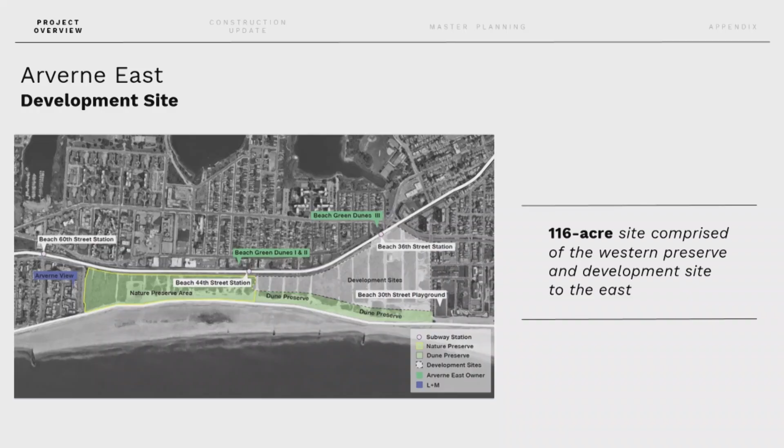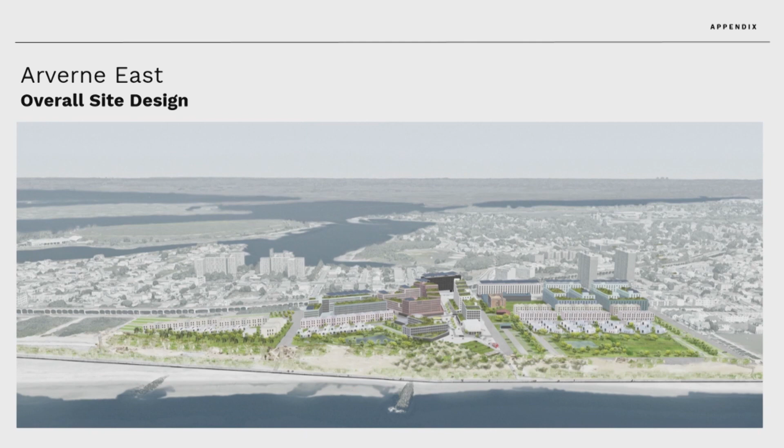So this is an illustrative rendering to give you a sense of what the site will look like when fully developed in context. Really what we're trying to do here is push the envelope for innovative, cutting-edge energy efficiency strategies and resiliency as well. Our goal for this project is really to show that you can build a mixed income, mixed use, environmentally just, energy efficient, what am I missing? Resilient project on the coastlines. So we're pretty excited about that.

Next slide. So just working through the development program, starting with housing. When fully built, we will have approximately 1,900,000 square feet of residential floor area across 1,650 units of housing of various typologies, from mid-rise multifamily to single and two-family townhouses. And what we're really excited about is we're bringing back a code-compliant bungalow to the area. The project is also a mixed income project. 80% is income restricted and affordable to households earning between 30% AMI and approximately 120% AMI.

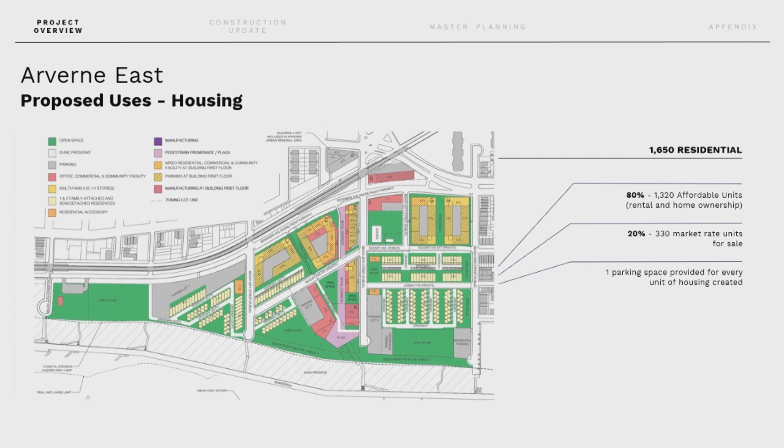20% will be a for sale market rate product. Looking at the non-residential space and going from west to east, we will be providing an approximately 3-acre not-for-profit run urban farm and native plant nursery. In addition to that, 10.5 acres of privately owned, publicly accessible open space throughout the development site to be programmed for both passive and active recreation uses.

There is approximately 300,000 square feet of non-residential space anticipated across commercial, manufacturing, and community facility uses.

I'm sorry, my neck keeps like.

Across community facility uses. We're also assuming a mix of retail typologies, including neighborhood retail and services to support the existing community members there and also future residents that will be living in the development. It will also include a 150-key boutique hotel, which will provide year-round programming and services, event spaces, meeting rooms, and a great alternative to JFK accommodations.

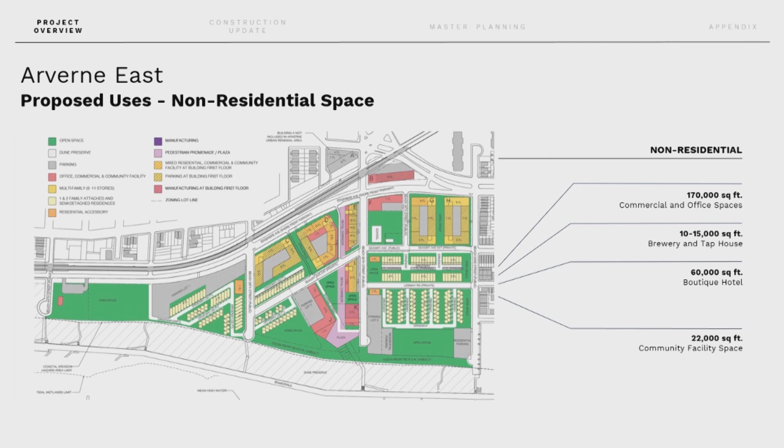We'll also be providing beach concessions, which are seasonal and really engaging with the beach plaza to the south and the boardwalk. They'll be bike-friendly, pedestrian-friendly, and paired with complimentary programming throughout the summer months. The retail program will be anchored by the Rockaway Brewing Company Brewery and Tap House. This will provide a year-round draw to the project and our residential promenade. The Rockaway Brewing Company is a local craft brewery in Rockaway that was formed and founded there.

Next slide. So how to approach development of, as Zach said, 116 acres of property that had been left vacant and underutilized for 50-some-odd years, that was decimated by Sandy. So the most important thing is resiliency. We don't spend a day in our office not mentioning resiliency in the context of this project. So we looked at it on 3 scales: from a land development perspective, from a topography perspective, really manipulating elevation, and also at the individual building level as well.

From a land development perspective, the development site itself is hugged by a dune preserve to the south of the site between Beach 32nd Street and Beach 44th Street. This provides a buffer to the north of the boardwalk but south of the development site. Most of the densest part of the program is really pulled north to Edgemere Avenue, which is a major vehicular spine in Rockaway.

We're also infiltrating all of our stormwater on site, speccing permeable hardscapes wherever possible, and also leveraging enhanced retention and infiltration through a system of bioswales and rain gardens. And hopefully in the next 18 months or so, we will proudly be the largest interconnected green infrastructure street in New York City with the reconstruction of Edgemere Avenue between 32nd and 38th Street.

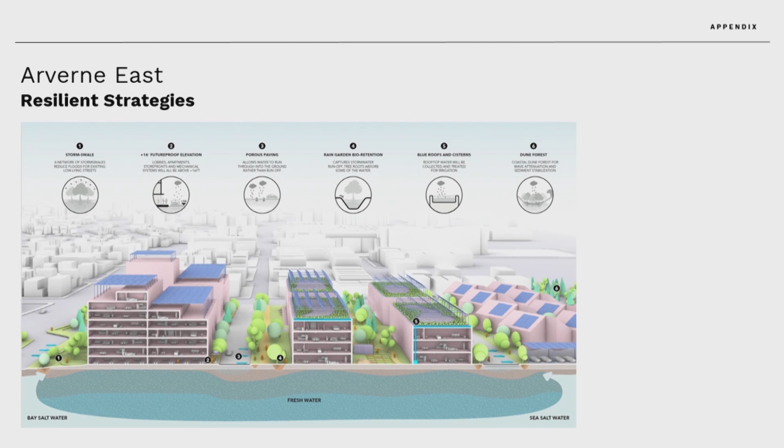Okay, energy efficiency. Again, we used a very similar approach with energy efficiency as we do with resilient strategies on this project, really looking at a suite of methodologies for our execution. Most importantly, on the geothermal side, we have experience in the Rockaways with existing properties in geothermal and those that are also in construction or pre-development. So we knew that the conductivity here and the geology was a really great fit for geothermal, paired with the diversity of the project, an ambient loop made the most sense to maximize energy efficiency.

So all of our buildings will be connected to the ambient loop to provide heating, cooling, and domestic hot water services. The residential buildings are being built to passive house standard and will also be taking advantage of significant renewable energy and blanketing the site with PV solar arrays to, I think when we're fully built out, we're assuming about 12 gigawatt hours. Did I get that right, Brian? 12 gigawatt hours? Okay. Of renewable energy will be generated on site.

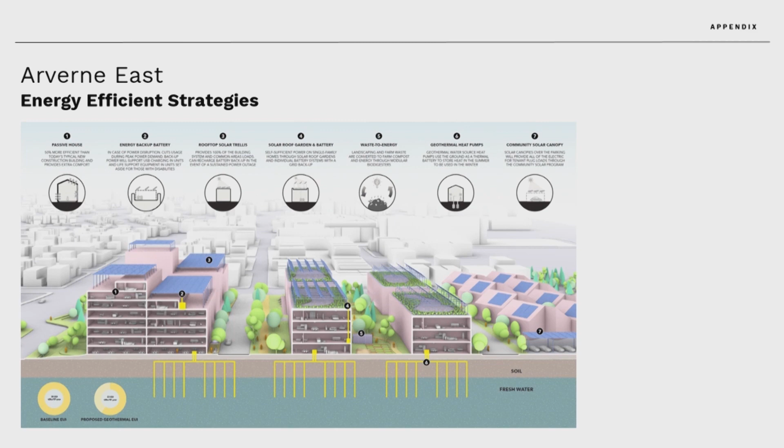So Rome wasn't built in a day. This is a phased development with a build of 7 to 10 years. Our build year is 2031. What you're looking at here are some of the assets that are currently under construction or wrapping up construction. We're wrapping up the restoration of the 35-acre nature preserve and a welcome center that will provide support to the nature preserve and to the native plant nursery and urban farm to the east. Those will actually be opening to the public later this spring.

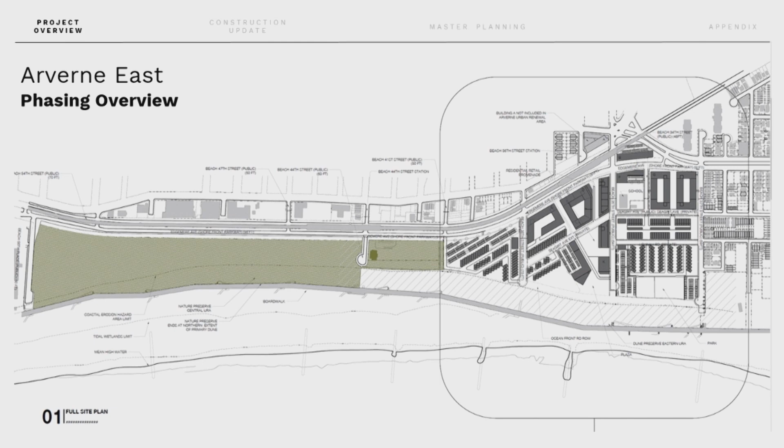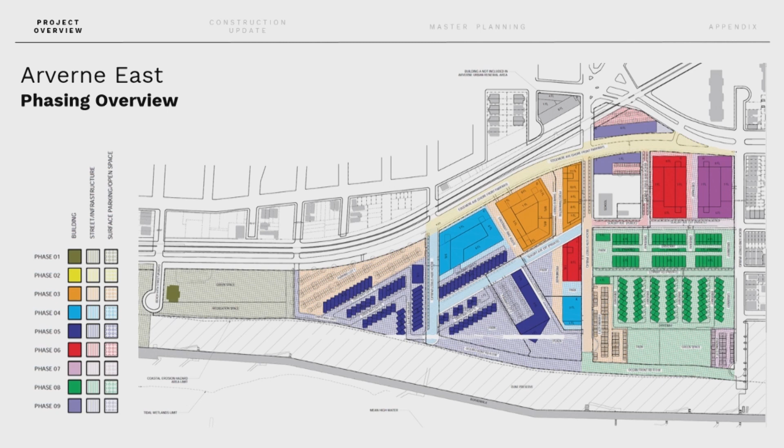Next slide, Zach. And then also, as I mentioned, Edgemere Avenue reconstruction between 32nd and 38th Street is currently underway. These are key public benefit projects that are pivotal to the success of the overall Arverne East project. And we're currently in design of the first residential building and parking lot, which is Arverne D, smack in the middle of the site, and the first phase of the ambient loop, which will commence construction in 2024.

and our consumption. I think the combination of the ambient loop and the passive house is really what is making net zero possible here, also leveraging site design and scale as well, but we're able to achieve net zero on site without any off-site purchasing or RECs.

I guess I'm gonna hand it over to Brian. Brian, you want this slide up? You want it? Yeah, thank you.

My name is Brian. I'm with Salas O'Brien, NY-GEO. And I don't know, was it maybe a year and a half ago, something like that, Sara gave us a ring and said, hey, we got this project and we got some really ambitious goals. And we looked at it and we thought, yeah, you do. This is really ambitious and how exciting.

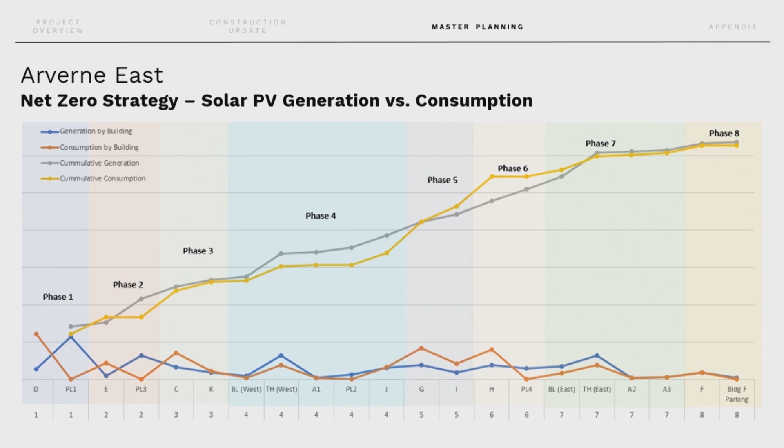And so one of the first things we did was develop the ambient loop roadmap, and that's what you see on the next slide, right, Zach? Go forward there. This was just the first concept of, number one, where can we put all these assets, and then how do we interconnect those assets to the buildings? And that all looked pretty good.

Initially, we put the plan down, started drawing lines on it, and it all just kind of came together pretty quickly. And then we get on a call, and Sara goes, well, wait a minute, this isn't all getting built at once. We got to phase this, okay? Now that throws a whole other wrench into everything because a lot of the space where we have assets to serve a certain load wasn't going to be available until the next phase.

So then you have to start going, okay, well, how do I interconnect all this and have enough resources and energy to actually get the first phase off the ground and get the second phase off the ground before you actually can interconnect everything in the final design.

And so if you want to go to the next slide, actually it might be, where's the color-coded one? Or did that get taken out? Oh, maybe it got taken out.

Oh, well. Anyway, we went through the phasing and the construction schedule and looked at how do we build this out and where can we put these assets and make it all work. And that's why there's actually a few double lines on the single pipe.

And those are really temporary pipes for the phasing schedule to be able to make it a loop, if you will, until the next phase is built, and then that would actually get shut off and force the fluid down the street to the next set of buildings and the next energy sources. So there was a lot of discussion conceptually about how do you make this work.

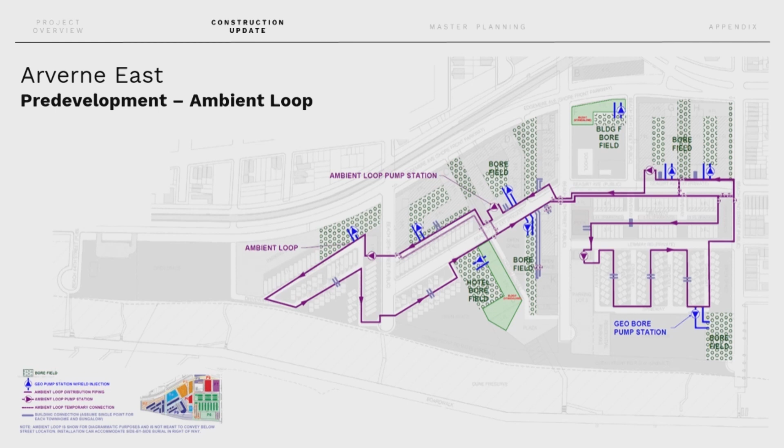But then, of course, we got into the energy side, and, Zach, if you want to go to the next slide. We looked at what the baseline would be. Obviously, when you do these studies, you have to have a baseline.

And then we looked at what is just an all-electric option? What does that look like from an energy perspective? And we also looked at carbon. What do those look like? And then what does a geothermal solution look like from an energy and carbon perspective? And then last, we added in sewage heat recovery or waste heat recovery. And so those are kind of the 4 bar graphs in the energy.

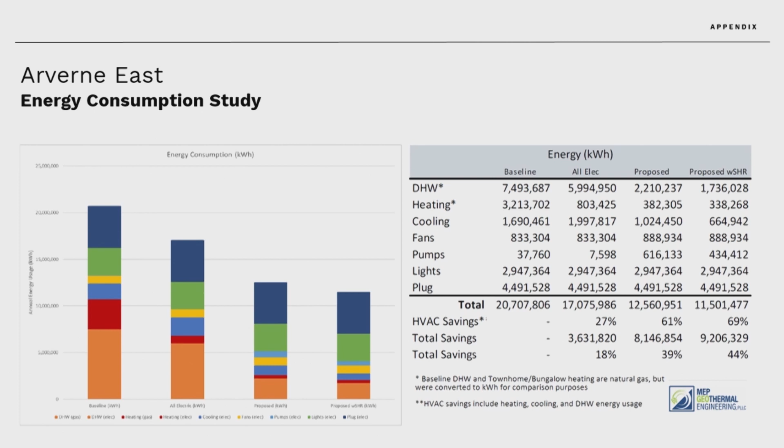And you can see, the savings is tremendous when it comes to energy. And then, of course, when you put dollars and cents to it, it looks really good. But the biggest one was the carbon. How do we get to net zero? And I think that's the next slide, right?

Yeah. So, when you add the solar component to this, because it's an all-electric development, now you can actually get to net zero. Not just net zero carbon, but net zero energy. You're actually producing more on site than you're using because we're very efficient and we're capturing every bit of energy that we can. We're sharing energy.

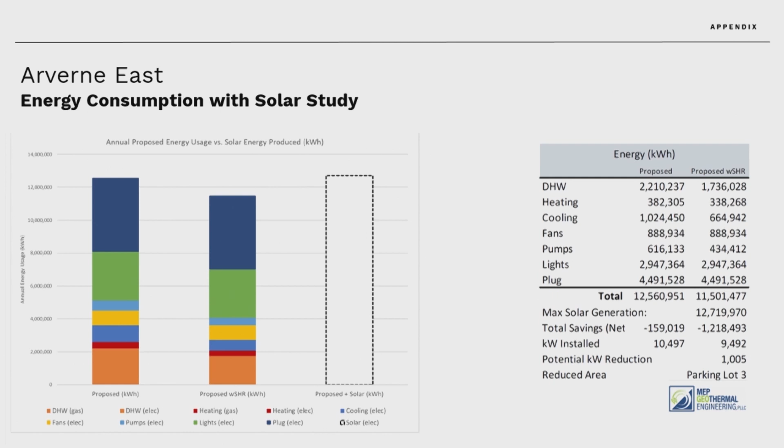That's kind of the study that we went through. It was really intense and a lot of fun. When you have big ambition, big goals like that, I think it really brings the team together and you can collaborate and open people's minds a little bit. And I think there was a lot of that going on. So we really appreciated the opportunity. But yeah, it's a fantastic project.

Yep, so I'm Sam Gerber with CDM Smith. We're doing the design for this project. And so where we start with the design, where you start in every geothermal project, is building energy modeling. As we kind of hinted at with the way we talk about phasing, a lot of these buildings are not yet in an advanced stage of design because they're not getting built for another 10 years. So we do, in eQuest DOE 2.2, block energy loads for these buildings with the information that we have right now.

And to get around the fact that the buildings aren't being built for quite a while, we run a significant number of sensitivity analyses on all of these buildings to try and account for the different things that we think can happen within the next 10 years. Because these buildings are all designed passive house, from what we do know, they're all going to be significantly cooling dominant. These are very tight buildings, very high degree of insulation, which leads to some challenges in designing our geothermal and ambient loop systems.

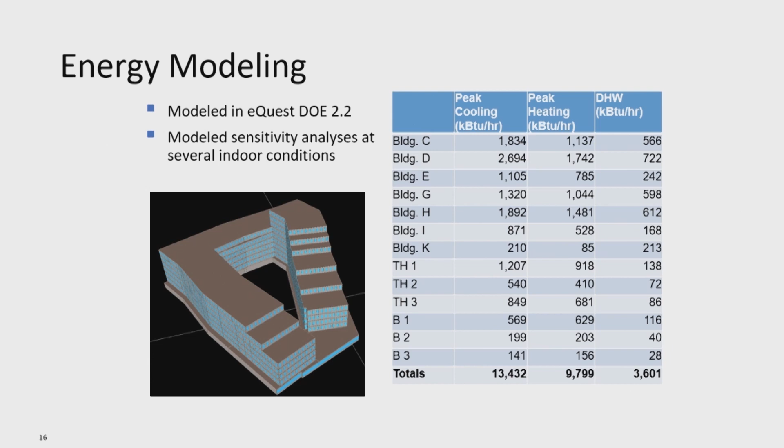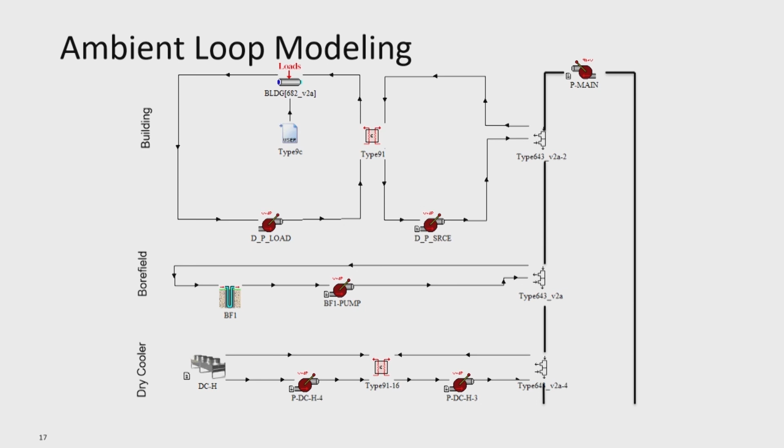So, moving on to the ambient loop side of the system, a separate form of energy modeling. We use TRNSYS for this part. We take the data that we got from our building energy models. We put them along an ambient loop, along with all of our bore fields, along with a dry cooler that we're going to need because these loads are so cooling dominant. And we enter that in, and we get the data that's shown here.

So if you look at our diagram up at the top, this shows the temperatures as you flow around our ambient loop on the site. The end goal of what we're trying to do is keep the entering water temperature to all of the buildings 90 degrees or below. You'll see this iteration doesn't necessarily hit that at every point, but that's our general goal for the design.

It's probably a little tough to read those, but each one of those nodes represents either a building or a bore field along our loop. So you'll see the temperature jumps. And actually I should have led with this: this represents a summer day 20 years into the future, which is how long our analysis runs.

So you'll see, as you go through a bore field, your temperature drops. You bring the temperature back down, it enters a building, accepts heat that gets rejected during an air conditioning process. Temperature rises back up until you hit another bore field and drops down. And it makes this fun little roller coaster of temperatures all around the site.

So if you look at the graph down below, you take this and focus just on one node over the course of 20 years, and we see the trend that we're really aiming for when we design these systems: we want to see a flat temperature curve, not increasing.

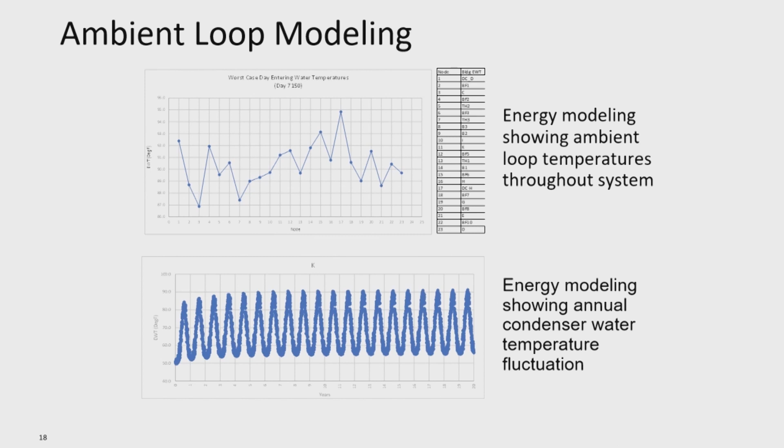So I buried the lead a little bit on how the ambient loop system works. I'm sure most of you are familiar with it. However, there's really three main components that we look at when we design it. We have our geothermal loop fields, we have our ambient loop, and then the building HVAC systems themselves.

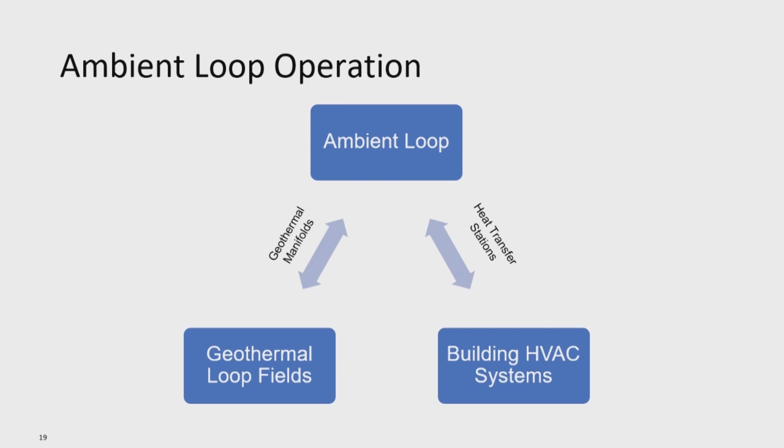The building HVAC systems either take in energy or expel energy into the system. They're connected by what we call heat transfer stations. We'll get into those more in a minute. The ambient loop moves all of that energy around the entire site, and then we use our manifolds to connect our ambient loop to our geothermal loop fields to essentially store that energy in a battery-like fashion to use in a different season.

So looking at that, yes, the main component of the system, the ambient loop that runs around the site, does look very similar to what Brian showed us a minute ago. You'll see we pass underneath the streets that run around the site, a mix of public and private streets, which is another design consideration that we take into account. Getting the right-of-ways and taking care of what we need to for coordination with utilities under the streets and things like that.

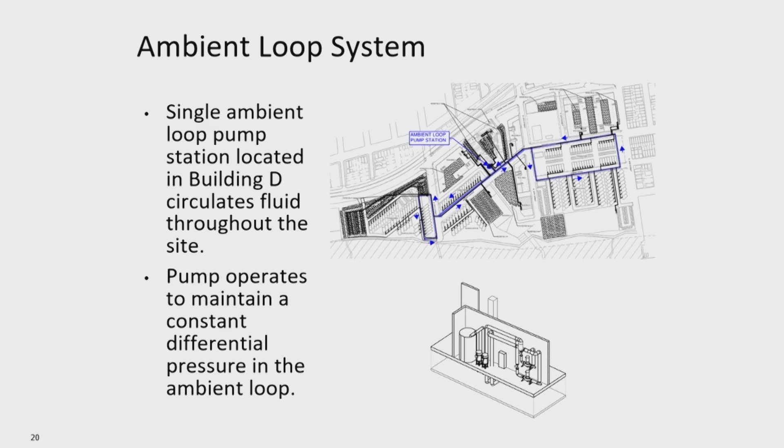So this is all powered and pumped around the site in the first building that's getting built, Building D. We have an ambient loop pump station in there that provides all of the pumping power to pump the fluid around the site. The loop will start off very small in the first phase and eventually pump all the way around. That pump just operates to maintain a differential pressure around the loop. We want to have a more or less constant flow in the ambient loop. It shouldn't change very much.

The second component of the system are geothermal loop fields. These are the bore fields that we all talk about in all these presentations. On this site, they're located entirely within site parking and green spaces. So we're doing our best to avoid putting any boreholes under buildings, because in this case, we don't have to. It's a cost reduction.

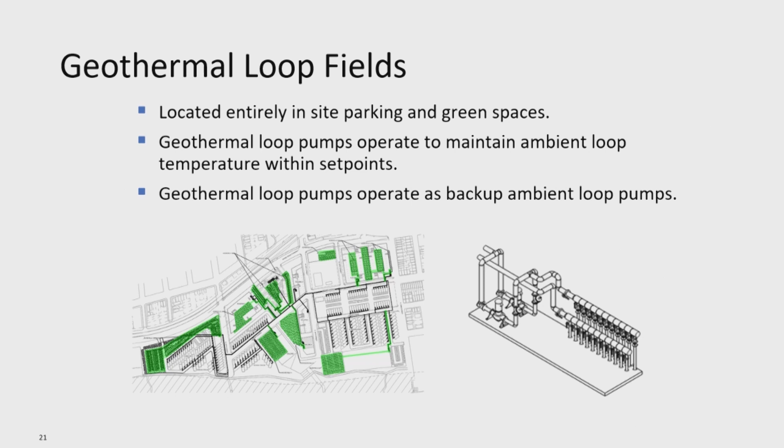So in each of these manifolds that connect the loop fields to the ambient loop, you'll see we have pumps. The way that these are controlled, they maintain the temperature of the ambient loop within whatever set points we set, 40 to 90 degrees. More on this in a minute. These pumps also act as backup ambient loop pumps. With the way that we have this circuited and looped, if we ever need to bypass, those become the ambient loop pumps.

Finally, heat transfer stations. These stations go in all of the end users. They connect them to the ambient loop. We want the end users decoupled from the ambient loop to prevent a situation where you could spring a leak in one of these townhomes, bungalows, buildings. You don't want to drain the system from all your neighbors. So there's a decoupling heat exchanger in the middle, and there are pumps for the building side condenser loop and for the ambient loop side to take fluid off of our ambient loop system.

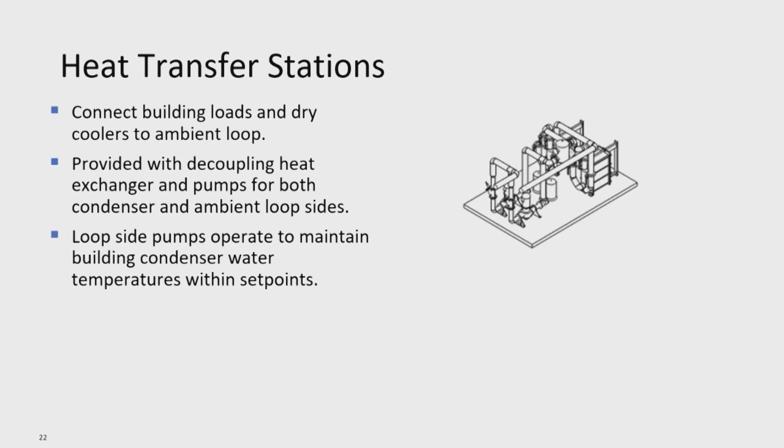Those pumps read the temperature on the building side of the loop and operate to maintain the condenser water temperature in the buildings between the set points that they're set at.

Okay, so as Brian discussed a minute ago, part of the complication of this project is it's not all built at the same time. We have to take into account project phasing and planning so that the bore fields come online to have capacity to serve the phase that's currently being built. And as Brian said, you need to have a closed loop at every part of the system. So sometimes that will result in essentially doubling back.

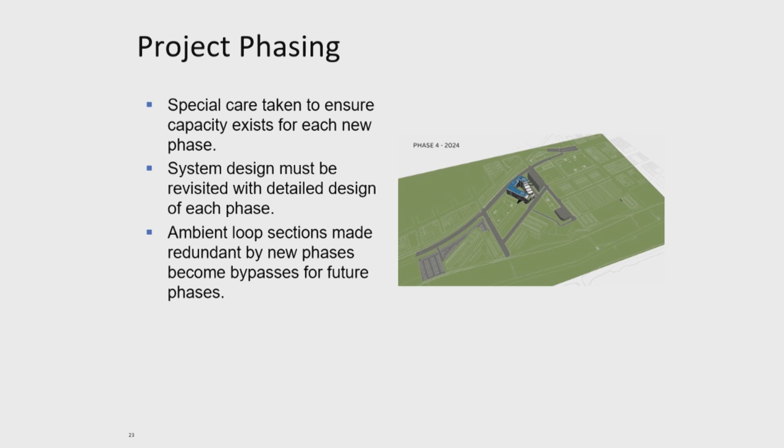So just for a quick overview on the parameters for the final system that we're proposing to design.

We're totaling right now 482 boreholes across 9 bore fields. As we mentioned in all the other projects, we can't go beyond 500 feet deep, so we are at 499 feet for all of them. For freeze protection purposes, we're at 25% propylene glycol inside all the loops, and then our dry cooler capacity right now is at 300 tons. Spacing in the bore fields is between 20 and 30 feet, as dictated by energy modeling.

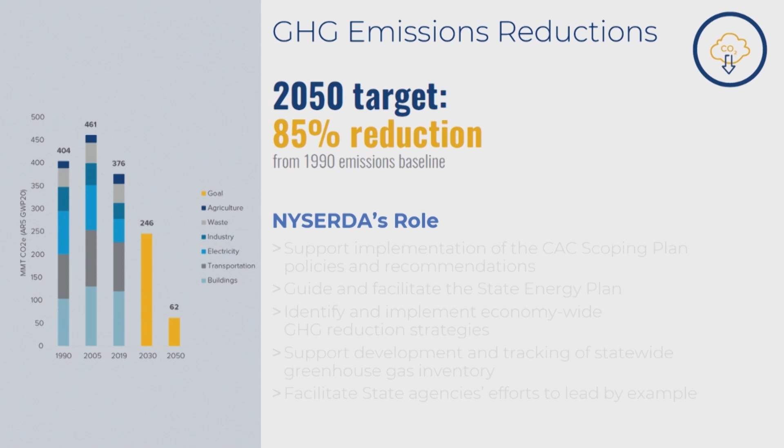So there's some guiding documents that can help us get there. Released in December of last year was the Carbon Neutral Buildings Roadmap, which I'll touch on a bit in an upcoming slide. We have pretty aggressive targets to reduce emissions, 185 TBTU, and I'm realizing through previous presentations that we should be talking about it in kilowatt hours if we really want to resonate with this crowd and with the electricity sector.

And I apologize for the font. It looked a lot darker when I made these slides on the computer, and now I'm realizing it's a little bit of strain on everybody's eyes. So these slides will be available after the presentation, so if you want to go and darken the font and actually see the words that are on there, you'll have the opportunity to do that. But I'll read some of the information on the slide.

So this is the approved scoping plan from December of last year. It lays out the framework for how to decarbonize across all the sectors in New York State. And like I said, I'm more of a thermal energy network enthusiast, so not to play favorites, but one of the strategies in there is the implementation of thermal energy networks. And we're doing that in a couple of different areas.

If you had an opportunity to sit in on other presentations, you were able to see the utilities talk about some of the proposals that they put in through the Utility Thermal Energy Networks and Jobs Act. And those projects are still in the selection phase with the Public Service Commission, so we're not quite sure where we'll land with all those projects. But a couple of years ago, we launched a program called the Community Heat Pump Systems Program. And like Zach mentioned at the beginning, this project was awarded Category B funding through that program.

Part of the challenge with a project like this is it's in PSEG Long Island, which has its pluses and minuses, one of them being that they don't pay into the system benefit charge. So typically they're not able to access NYSERDA funding. So we were fortunate enough that they added another source of funding that was able to help fund the design of this project. But Sara, do you want to touch a little bit on the public-private partnership with HPD and just how a project like this comes together from that?

And keep in mind, there's a bar right after this. So like the minute version. Sure. There's a microphone.

I thought you were saying that so it can calm my anxiety, because how do you pay for $1.5 billion worth of investment? So I think public-private partnerships are key to this project. As I mentioned before, it's being developed on city land. It's 80% income restricted. And so really having those partnerships with HPD, HDC, but we're also working with DOT, DEP, the Parks Department, and also New York City Hall. I think I got all the acronyms. And now NYSERDA, thank you.

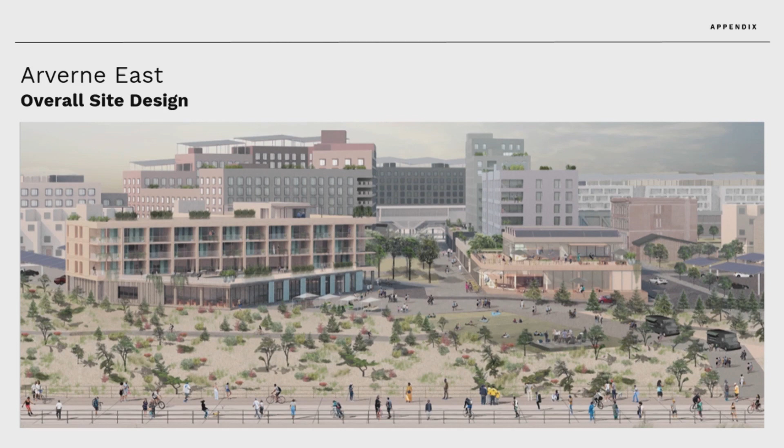Hi, that was great. Did you say how many units of affordable housing it would include? I know you talked about the square footage. Sure. There's 1,650 units of housing total, and 80% of those will be income restricted, so approximately, doing math in my head really quick, 1,330 units.